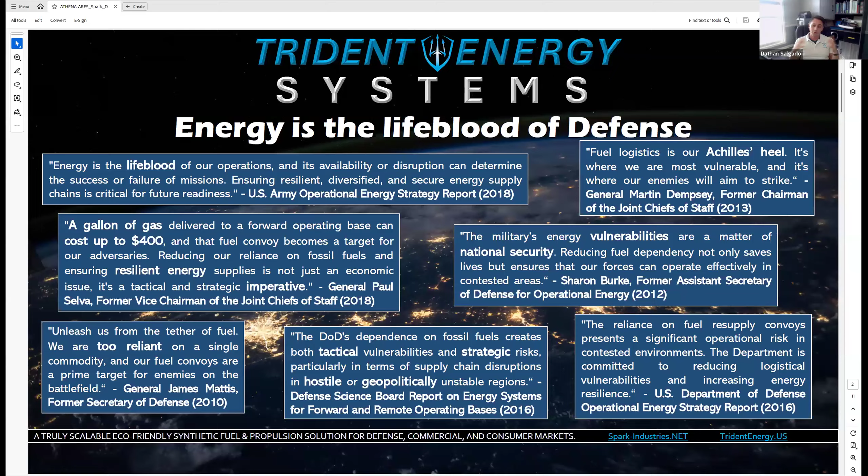So Trident Energy Systems, with our fuel, we can produce it from air and water, operate for between 2 and 10 years unsupported, with a modular palletized fuel production system. And with that fuel, we can do some pretty amazing things.

So the Athena jet engine is the all-altitude tri-mode hybrid electric non-turbine aviation engine, and its derivative, the all-altitude reusable rocket engine, single-stage to orbit. The main difference is that one has a fuel mix that includes an oxidizer for low oxygen or space environments. The other doesn't. Otherwise, it's fairly similar core technology.

So why is it important? We got asked by the SecDef's office to do some engineering comparisons last year. What we came up with was, it turns out an F-15, if we did a max range mission, can get out to about 2,400 nautical miles with standard fuel and engines. With our engine, we can push that out to 13,900 miles, meaning an F-15 could all of a sudden, with our engines and fuels, nearly circumnavigate the entire globe.

And let me explain why our fuel is so groundbreaking. Traditional jet engine stores energy in just one way, in chemical bonds. The problem with that is, when you increase the amount of energy on your aircraft or vehicle, you have to increase weight. The only way to add more energy is add more weight with your high density bonds. Our fuel doesn't. We store energy in 3 ways: thermal, electrical, and chemical, with a high expansion ratio that allows us to do a lot more things more efficiently when we're talking about propulsion or energy.

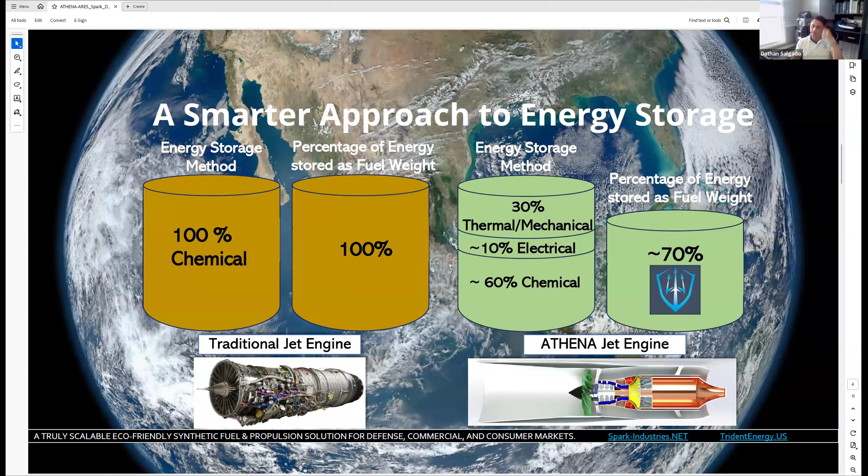So why is it better? A normal jet engine intakes air, compresses it, mixes it with an air fuel mixture, combusts that fuel, and then extracts energy from that burned mixture to run the compressor. Whatever's left over, you get used for thrust or lost as heat. With about 30% of your total starting fuel energy used to run your compressor, about 30% lost as heat, and about 10% lost due to incomplete combustion, there's very little energy left over to become useful thrust.

Since the jet engine was first invented in 1930, the only real advances in jet engine technology have been in material science, allowing us to burn fuel hotter and run better materials in our turbines and nozzles. So as long as you mechanically extract energy from your exhaust the way traditional jet cycles do, the best you can do is about 40% less efficient than the Athena jet engine.

The Athena jet engine cycle is radically different, using fuel to cool the nozzle and run the compressor, similar to how a rocket engine's fuel turbo pumps work. Once the Trident fuel air mixture is detonated, it exits directly as thrust. So you get higher velocities, and you use what would otherwise be lost energy in the heat of your exhaust to run your compressor. That leaves you with about 40% efficiency advantage right off the bat. There's just physics that create a gap there that no other traditional jet cycle will be able to match, even with perfect combustion.

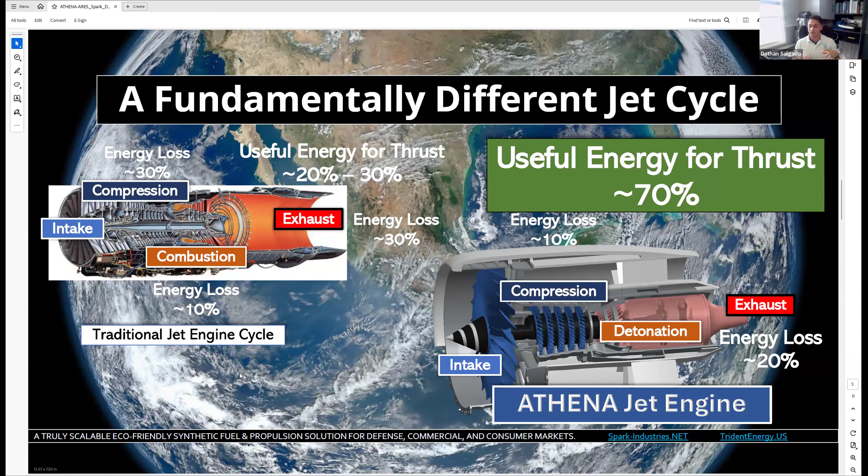Now, when you combine that with nitrous oxide as an oxidizer, which is non-cryogenic, the difference becomes really apparent. Compared to the Falcon 9 Merlin 1D engine, which is a two-stage engine, our single-stage engine would save you over 300,000 pounds in oxidizer and fuel weight to get into space. That means you need less thrust or you carry bigger payloads, and it starts making rocket science a lot easier.

If you look at the fuel efficiency measurement at sea level, 283 seconds versus 4,925 seconds, using the oxygen in the atmosphere as your oxidizer for your fuel — very low at low altitudes when oxygen is abundant — makes the most sense.

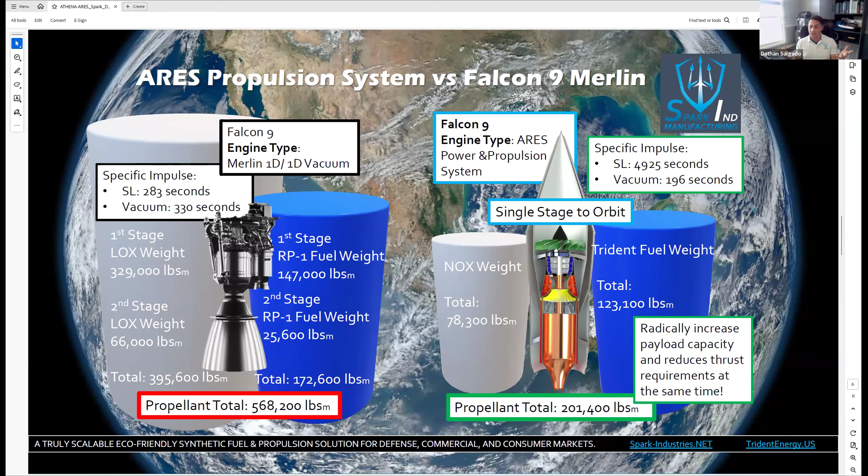So why is our engine better than anything else out there? Well, it operates in 3 modes. We can do a fully electric mode for low thrust operations, taxi, cruise, those type of things.

Or when you want to go stealth, right? Because you're going to have basically no thermal signature, which is huge, especially when you're trying to create the collaborative combat aircraft or NGAD supporting systems, whether that's drones or primary aircraft that want to maintain stealth. There's no other propulsion system that gives you, or that's even envisioned or proposed to our knowledge, the opportunity to actually have stealth in IR, in the thermal range. Everything else is simply in RF, the radio frequency or radar range.

Then we can operate in our RDE fanjet mode, giving you quite a bit of capability and lowering the thrust specific fuel consumption down to 0.33, which is unheard of in jet engines. And then finally, you get ramjet or scramjet mode, which allows us to go at very high velocities. Because we're using rotating detonation and an aerospike nozzle, that gives you a vastly increased altitude and airspeed range where you maintain efficiency. One of the other key things to note is that because we have no high temperature turbine, your maintenance requirements are going to go down drastically.

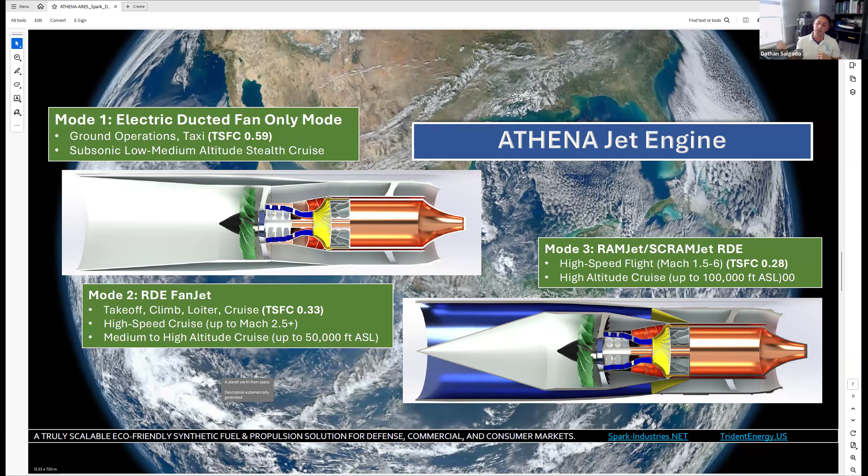One of the things we're looking at for our next steps, we have several phase 2s that we're looking to start work on this year, actually in just a couple months, in conjunction with our FAA Part 33 engine certification program. What we're targeting is TBO or maintenance intervals that vastly put everything else in the market to shame, doubling or potentially even tripling maintenance intervals. And that is the real cost savings that you get over the life of an engine.

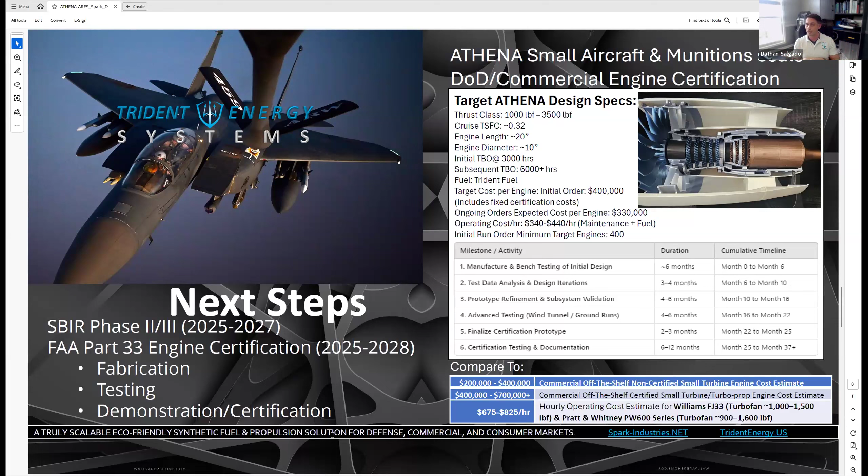You can see what the comparison is. We're projecting an operating cost of $300 to $400 per hour ish versus the $600 to $800 per hour that you get with the same size engine, for this first engine that we're going to do, which is a small scale, small jet or munitions scale jet engine.

30-second warning. Yep. So what are we looking for?

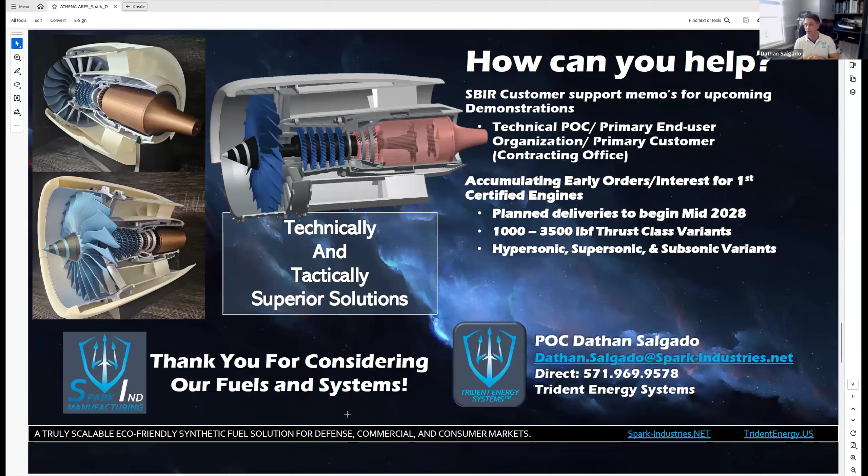Anybody out there in the government that can help us sign our customer support memos for our 2 efforts next month. And then also looking for interest, to accumulate the early orders for our engine certification. We want to drive down that fixed cost, that per engine cost, by getting as many out there. Our target is going to be an initial order of at least 400, but happy to take more and scale our target manufacturing 3 years down the line to deliver on whatever that is.

So that's what we're looking to do. We're working with Air Force, AFWERX, AFRL, Headquarters Air Force. There used to be an A57 Logistics Under Attack Team. They're transitioning to a whole other unit, much more broadly focused on the entire Air Force. And then several partnerships with the Air Force Academy.

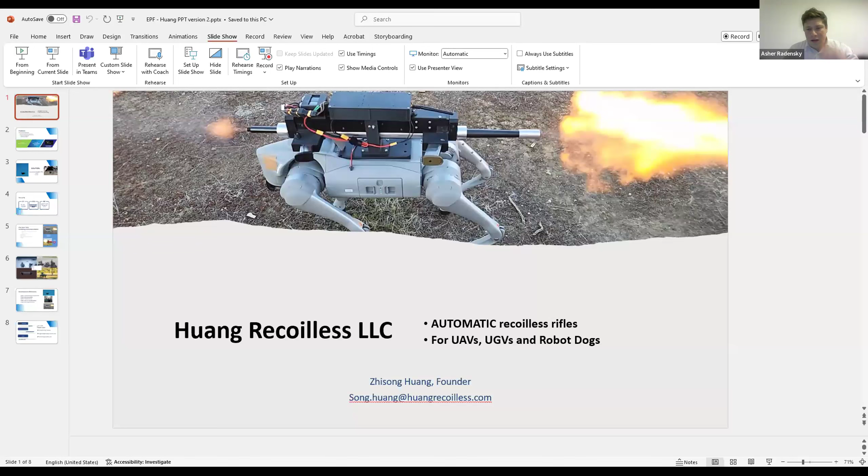Can you guys hear me? Sorry, we can hear you. Yeah, can you switch the displays? Okay, sorry, yeah, maybe, all good. Sorry about that problem, maybe it's because of my display setting. Let me do - yeah, it's just that in the PowerPoint we're seeing presenter view. Is it better now, or do you guys see my screen? I see the whole PowerPoint. If you want to share and then swap the screens, I think that's the easiest way.

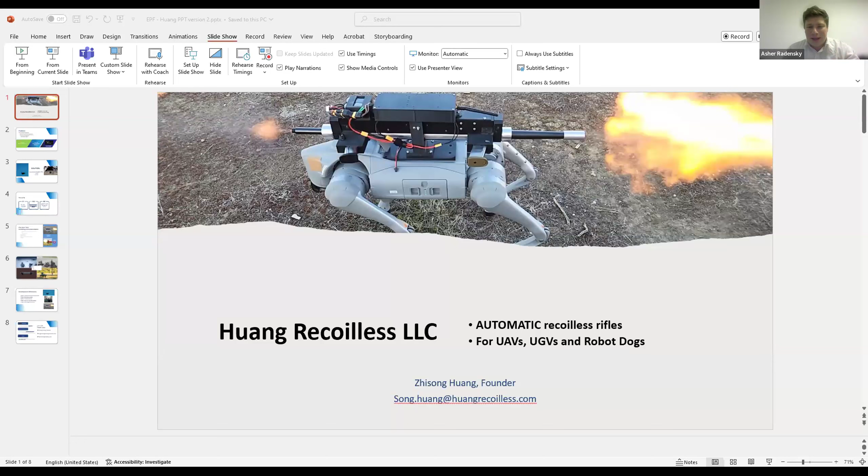Yeah, if you want to do it from the beginning. Here, it's not loaded yet for me. Sorry. No, you're good. I should put it - should I do something here, or do you take care of it? No, if you want, just click play from beginning or present slideshow, and then switch the view. So I can start? Yeah, go for it. Okay, if you want, just switch the view here - if you go to display settings, you can switch the view. I don't know if I'm being too pedantic. Should I go on? On the top bar, right next to show taskbar, there's a display settings.

You see what I'm talking about? Next to end slideshow. That could also work probably. On the top bar on this page. Whatever, yeah, we could go ahead. It's up to you.

Okay, let me quickly try again. Approve, you have control now? Yeah. It should work. Sorry. No, it's not letting me do it. That's fine, but just go ahead.

Okay, my name is Song. I was not a firearm expert, so I think the only reason I got into it is because I can bring some outsider's perspective into a quite long-standing firearm industry. Some of the ideas that are out of the box for them are in the box for me. So it just happens that I think there is an idea the firearm industry should look into, and that's why I got into it. I cannot convince people from my track record, but I just want people to judge the merit by looking at the things that we make.

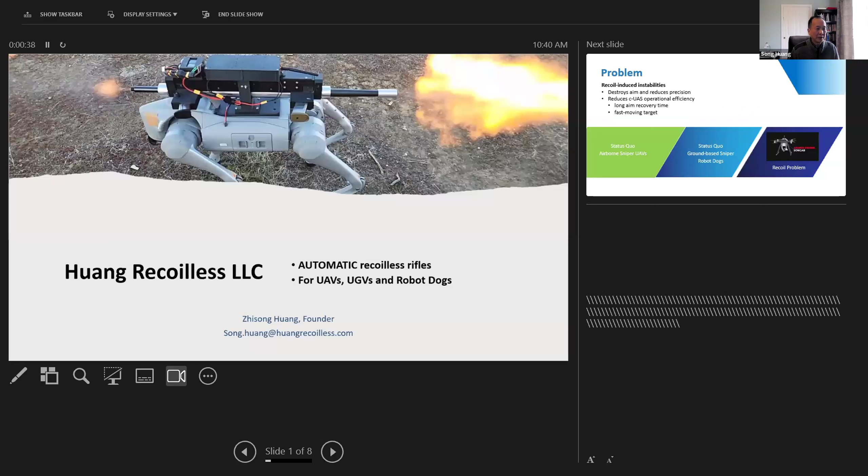Song, I think you need to, here, I'm going to share the slideshow from my side, if it's okay with you, because I think it's not moving forward. I shouldn't have done this extended screen thing. Yeah, I think that's the downfall. Did I? That's okay.

Give me one second, just need to open it. Bear with me, everyone, sorry about that. Brian, unless you want to share it on your end, because it's taking me a second to pull up. Or should I kill my extended screen and restart? Yeah, I could do it on my end. It's fine, it's opening now. Okay, perfect, I have it. Sorry about that, everyone. And I could share sound. So that's good. All right, we were on slide 2, right? Yeah, perfect.

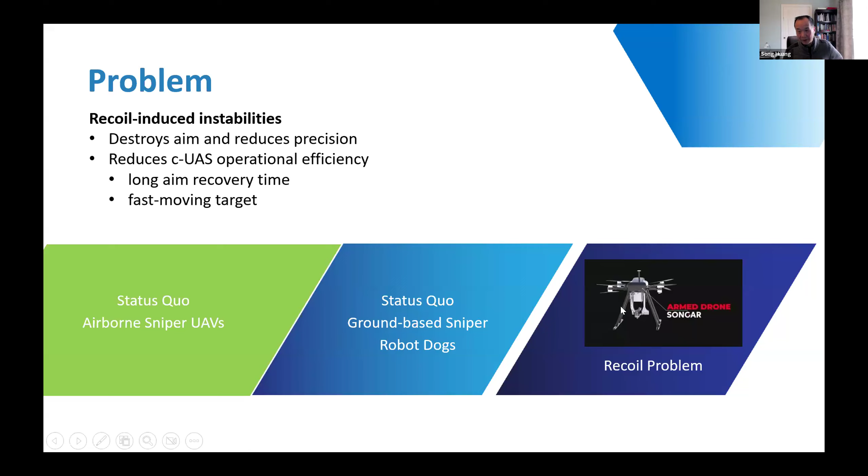Okay, I think I got this. So basically, let me just quickly go through. So the problem we are solving is recoil-induced instabilities, and let's see if I can move on. Can you move to the next slide? Yep.

Okay, so the benefit of a recoilless unmanned system is obviously stability, as you just saw, and increased precision firepower. It will also increase combat efficiencies in multiple combat scenarios, such as counter-UAS, swarms, and other cases. Next slide.

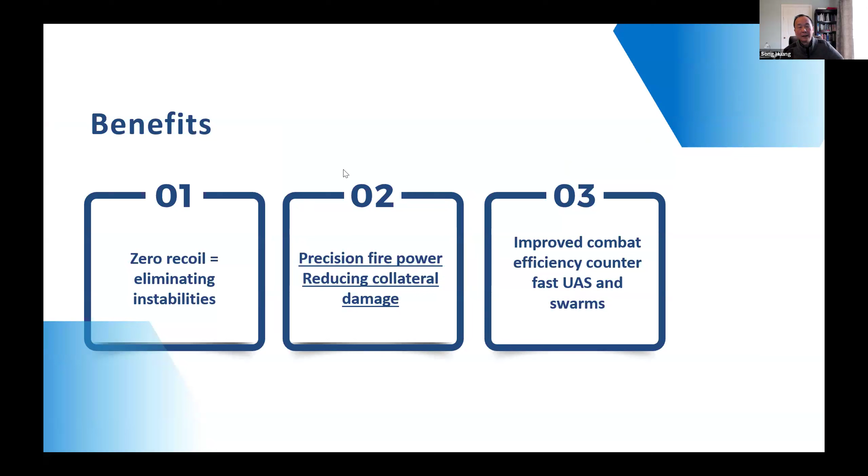For example, if you put it on a drone, you can only get one shot per mission, because the drone has to come back to be reloaded. Ours is fully automatic, so you can basically empty the ammo in the magazine during your mission. In essence, what we achieve is a way to integrate Maxim's idea into a Davis gun design, such that the recoilless rifle has all the operating characteristics of a machine gun, and it's also very fieldable. Next slide.

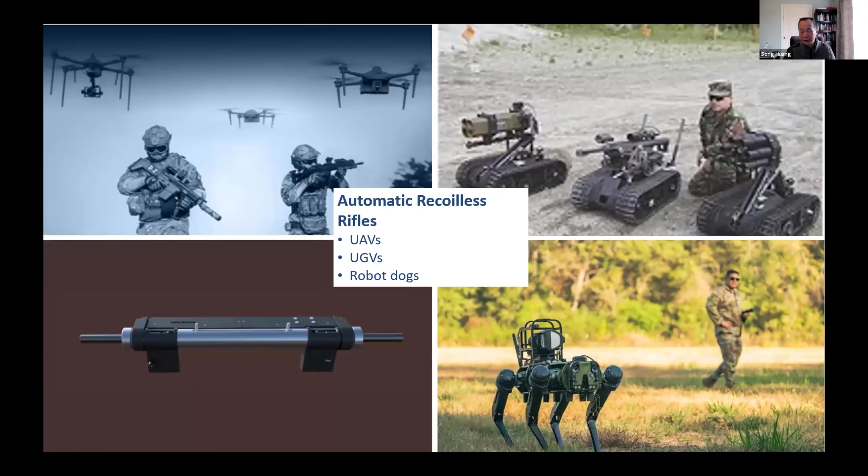Can you get to the slide where it shows the traditional one? No, the other one, the one that shows how you... yeah, this one, okay, I'm sorry. The next one? Yeah, this one, okay. No, okay, go back to the one that shows the compare, yeah, this one. Okay, no, yeah, okay that's fine. Actually, okay, so yeah, I'm sorry about that.

What happened is that the conventional recoilless rifle ammunition is very special. It's designed to use ammunition where the propellant goes in one direction and the projectile goes in another direction. It's a single piece ammunition. Our innovation is that instead of doing that, we divide that tube into two. So you use regular ammo to launch the projectile—in this case, a regular machine gun ammunition—and then you use a second ammunition to launch the compensating mass, in this case a blank ammunition. So the ammunition we use is composed of first a regular machine gun ammunition for launching the projectile, and then a custom-made blank ammunition to launch the compensating mass. And those can be very cheaply made.

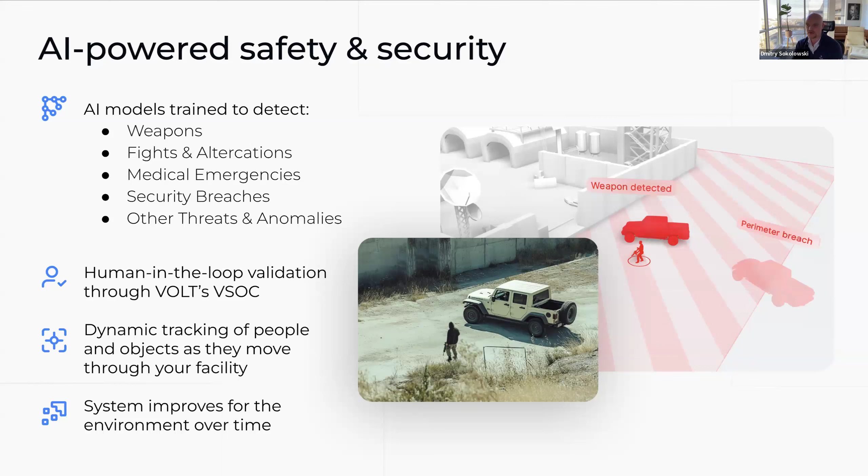We've built a proprietary algorithm to actually do the tracking, so we don't rely on facial recognition. We take into account a lot of visual features of an individual, as well as temporal features of how people are walking, the gait analysis.

We create a fingerprint for individuals across the cameras, and no matter what cameras you have, that individual can be tracked across many of these cameras, all in real time. We don't actually identify that person to a given identity — we fingerprint them, so to speak, and track them without the need to invade privacy or run into other regulatory restrictions.

Lastly, we enable security practitioners to do historical investigations of what happened much faster. Utilizing Gen AI capabilities, you can interact with your security infrastructure now with normal natural language. You can say, hey, show me where the white cars are.

Now narrow it down by only parking garages. Now narrow it down to where people interact with these cars. That really quickly pinpoints exact locations, cameras, and the time you need to investigate. And from that point on, you can say, create an incident, add these frames to the incident, and so on, without spending hours and hours to find where the incident occurred.

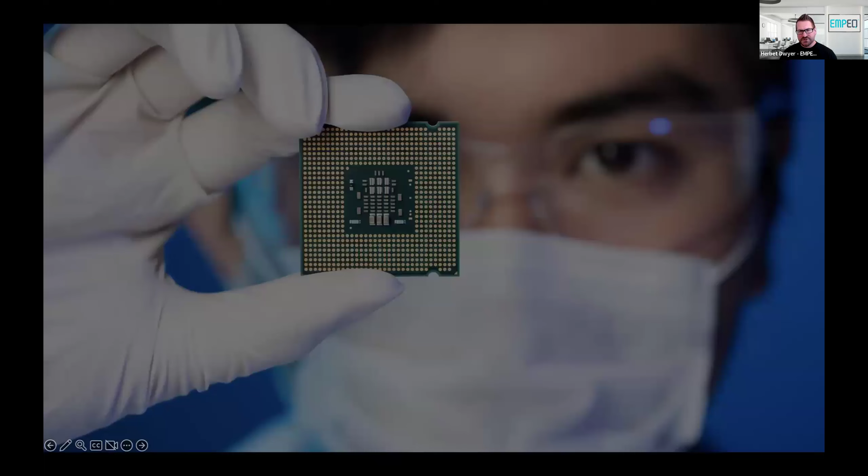Teams of people tediously inspect parts and equipment and do everything they can to ensure there's not a single counterfeit part amongst them. The work they do is critical for our personal safety, national security, and our way of life.

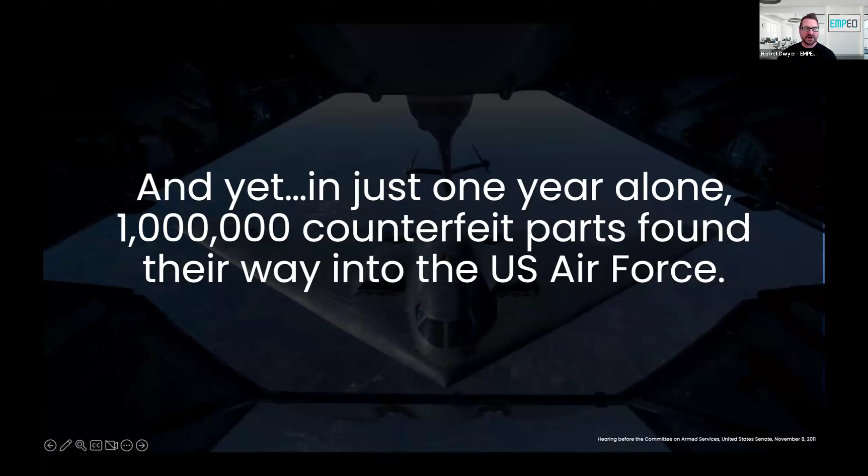Yet in one year alone, over 1 million counterfeit parts found their way into our nation's defense systems. And this is only one year in one division of the federal government. The issue is even more rampant in the commercial sector, with over 25 million parts annually.

United States Air Force pilot First Lieutenant Schmitz was an unfortunate victim to this massive problem when his F-16 crashed and killed him, 100% due to counterfeit parts.

But why do counterfeits pass through? Because inspecting and analyzing equipment and parts takes expertise, a distributed workforce, and many times expensive laboratory facilities and research. None of these are scalable solutions.

Hi, my name is Herbert Dwyer. I'm a Marine veteran and former NSA task operator and critical infrastructure auditor. I co-founded EMPEQ, a company purpose-built to fix this problem and others like it. Our mission is to connect the equipment you see with the information you need for faster, more effective decision-making.

I've assembled the best team I could find. Here's some of my key people, including our CTO, James Crouch, who was handpicked by Steve Jobs in 2008 to stand up Apple's App Store. He's an expert in cloud, mobile, AI, blockchain, and many other deep technologies. The rest of my team, including myself, are experts in various necessary disciplines to create a rounded minimum team.

So why do we call it data enrichment for critical infrastructure? Imagine being able to take a picture from your smartphone and get insights on accurate data on complex equipment and parts in a fraction of the time it takes using traditional methods. That's exactly what EMPEQ does.

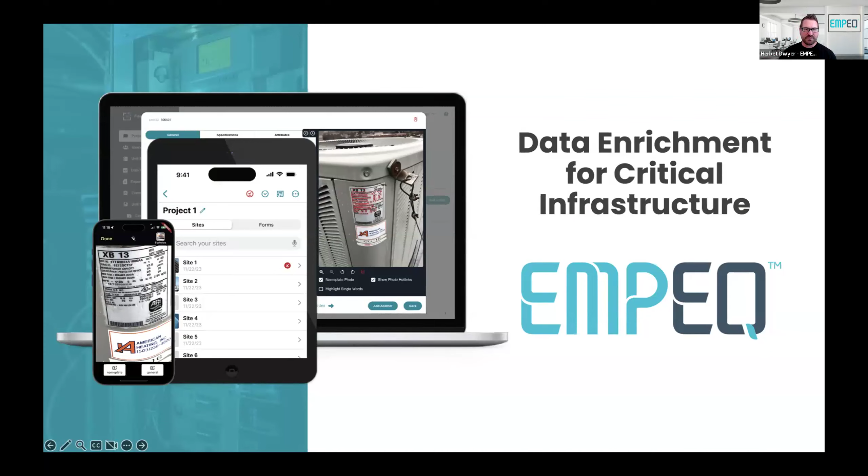Our solution combines cutting-edge computer vision, applied intelligence, small vision models, and extensive data sets to transform the way we capture and analyze data of the many types of critical hardware that power our globe. Plus, we're building the world's largest equipment and part repository. We've also generated unique IP and are seeking 4 patents.

It's not just the lurking counterfeit parts in our critical infrastructure we should be concerned about. It's also the faulty logistics systems, antiquated and inefficient equipment and parts that are hidden threats. We experience these hidden threats in our drive home, flight to a conference, in our office buildings, the cars we drive, the boats we sail, and many other things that contain hardware.

This is why it's a quite large market, standing at almost $30 billion across the globe with a SOM of $2.2 billion, again, annually. The core of our platform has the ability to connect images of real-world objects with the information professionals need to make critical decisions about parts and equipment.

But it can also be used for logistics. For example, the Department of Air Force plans to use our technology to replace old 1950s processes like simply identifying parts for replacement or repair.

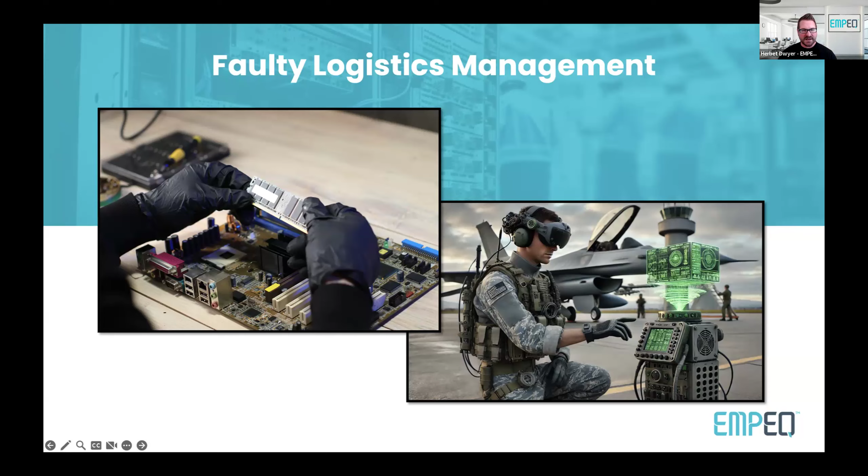Plus, in the future, those great technologies like augmented reality will need a back end to really identify what the warfighter is looking at and seeing and providing instant insights. Let's also not forget about some of the less sexy uses of our technology, including building energy audits and helping the DoD pass its first audit in many, many years.

Our competition typically includes individual substitutes being stacked that lack the specialization and cohesiveness to equal the power of EMPEQ. Because EMPEQ's solution combines cutting-edge computer vision, applied intelligence, and extensive data sets to transform the way our customers capture and analyze data.

EMPEQ's go-to-market plan is working. We've already closed paying customers and partnerships with some of the largest industrial leaders worldwide, including the US DOE, Canada, Johnson Controls, Siemens, and others. Plus, we also have a closed contract with the Pentagon.

The Department of Air Force at the Pentagon contacted us to solve the counterfeit part conundrum and awarded us a direct phase 2 contract. We're just wrapping that up actually next week.

And given our D2P2 success, the DAF has expanded our contract to include a $2 million TACFI with the head of supply chain to tackle many of the integrated weapons platforms like the B-1, Minuteman III, B-52, and F-16. Finally, the warfighter can get these critical platforms back in service much faster by dumping old processes and replacing them with EMPEQ.

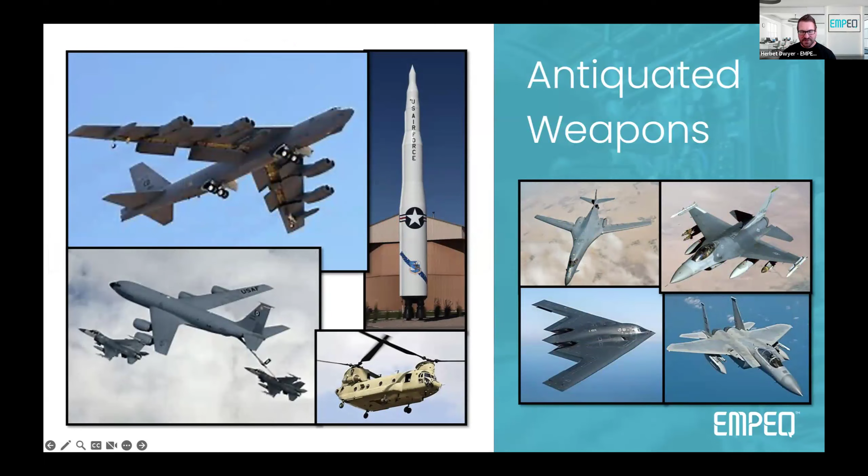Today, we're here looking for program offices that are interested in partnering, investors for EMPEQ's current financing round, partners for future SBIRs and STTRs, someone or maybe multiple someones for the Mentor Protege Partnership Program, and of course, commercial and government customers. Thank you very much.

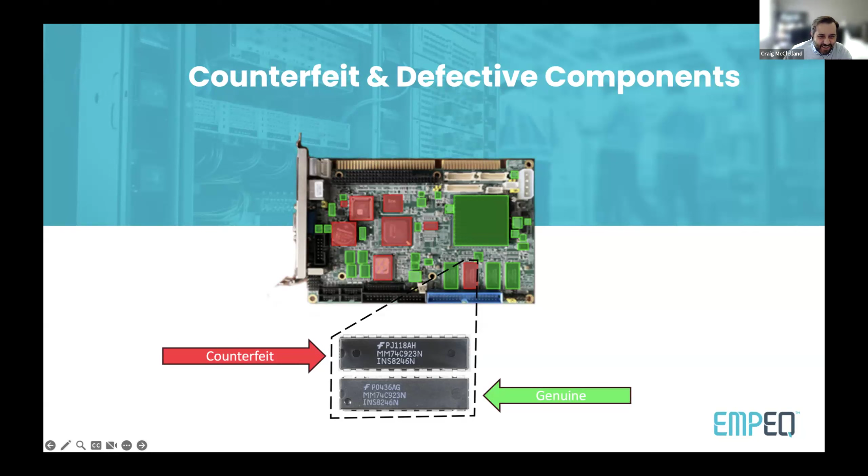Many, actually—Canada is a great partner of ours. We are partnered with Natural Resources Canada. We are the front end for RETScreen, which has about 800,000 users worldwide. It's an incredible energy modeling platform, the biggest in the world, actually. So we finished phase one, we're moving to phase two.

But yeah, as you mentioned, Carleton and many other universities and campuses across Canada. I won't mention specific customers and sites without permission from our customers who did those audits, but yeah, we are very active in Canada.

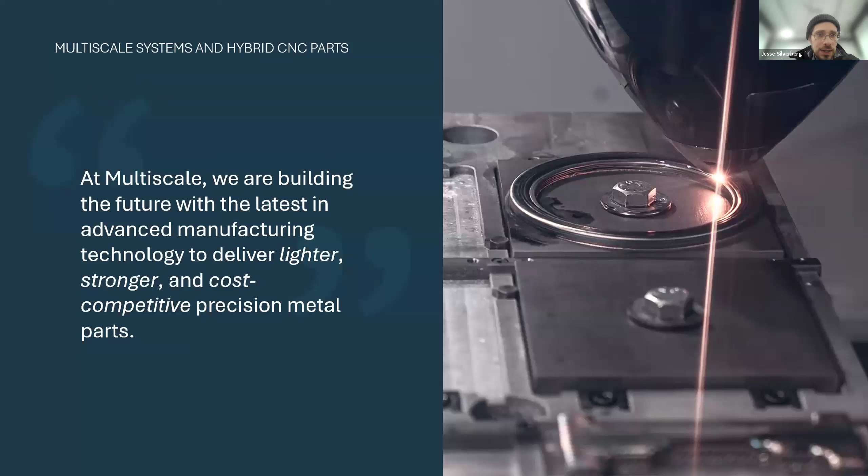Multiscale Systems is really focused on engineering and design, whereas Hybrid CNC is all about precision manufacturing with some advanced manufacturing techniques. At Multiscale, we are building the future with the latest in advanced manufacturing technology to deliver lighter, stronger, and cost-competitive precision metal parts. On the right-hand side, you can see a photo of an example where we have a part being built with a hybrid process, which combines both additive and subtractive manufacturing.

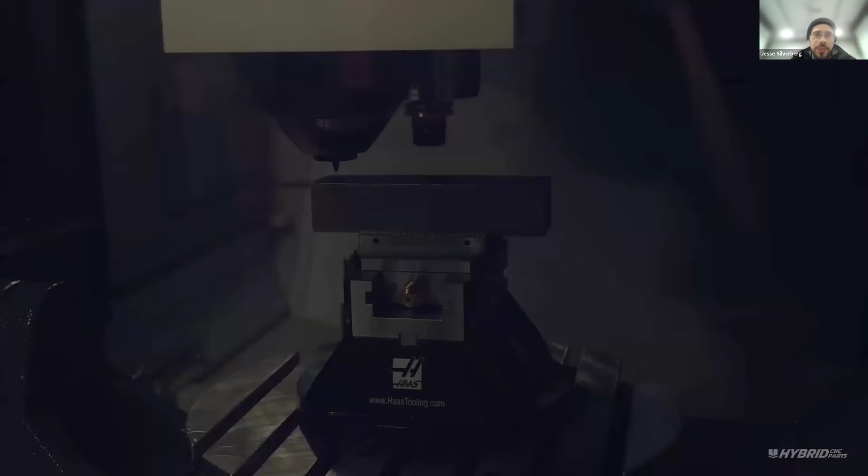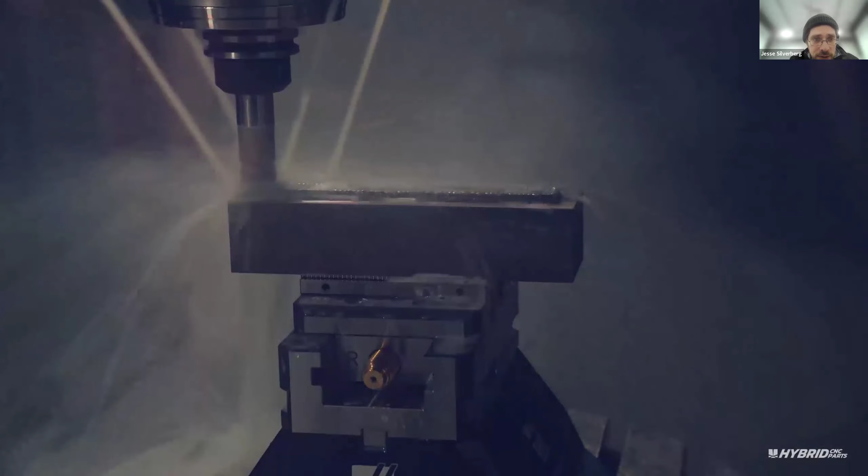This is some promotional video from our CNC manufacturing group, showing what the hybrid process looks like. Essentially, what we're doing is fixturing up materials, and we are laser welding from wire to create stock material that we then precision machine. In the background you can see the spindle, and now it's moved to the foreground where it's using the cutting operations to bring that part into shape.

We are comfortable not just with additive and subtractive techniques in a single fixture, but we can feed in multiple different wire feedstocks to allow us to weave together different types of alloys. In addition, all this happens inside a 5-axis CNC, which allows us to get a very high degree of complexity. All that information is available on our CNC shop's website if you want to see more about what they do, essentially a job shop.

From the perspective of this audience, what's important to highlight are a couple of the differentiators and competitive advantages for our technologies and process. On the additive front, there is a lot of scar tissue in the industry built up from powder metal additive manufacturing, and I want to distance ourselves from that and say we are working with wire, not powder. We are producing fully dense components in a finished state with this combined additive and subtractive technique, which allows us to offer low volume production that's flexible with no minimum quantities.

Because we are vertically integrated with engineering design, we have a team of people trained to think about what hybrid manufacturing processes can achieve, whereas people who have come up a more traditional manufacturing route tend to think in purely subtractive, purely additive, purely injection molded, or purely thermoform processes. We really have the ability to create tailored components for unique requirements, even down to reverse engineering legacy parts and replacing them with our techniques.

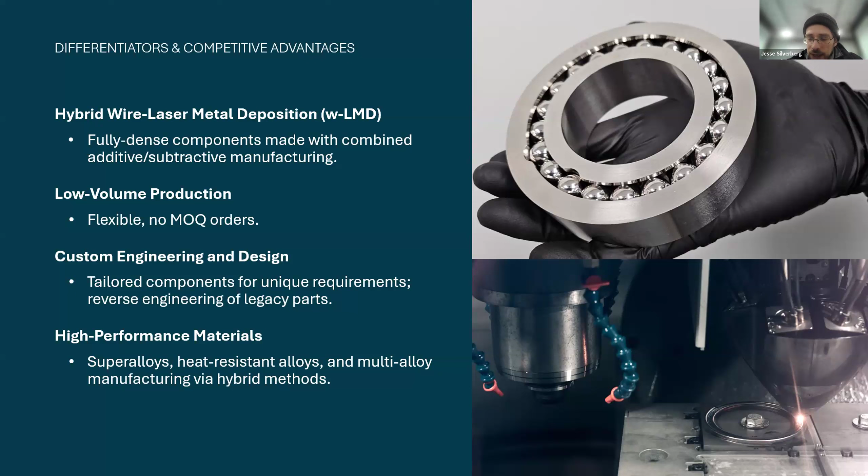The other important point is that we've found a niche for ourselves in high performance materials, things like nickel super alloys, cobalt chromium alloys, high molybdenum or high chromium content alloys. Being able to combine multiple materials into a single structure is another unique thing our technology lets us accomplish. As far as applications go, we got started with all of this on SBIR funding, starting with Department of Energy, but it has expanded into NASA SBIR funding as well.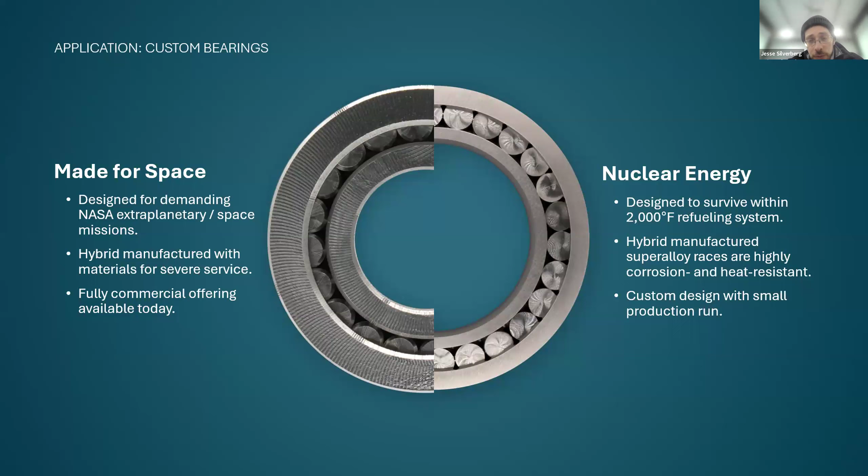In both cases, we do the design work, we do the first articles, we do production, and we do inspection as well. So again, vertically integrated.

Oh, hey, look at that. I got a bullet point on this. Vertical integration.

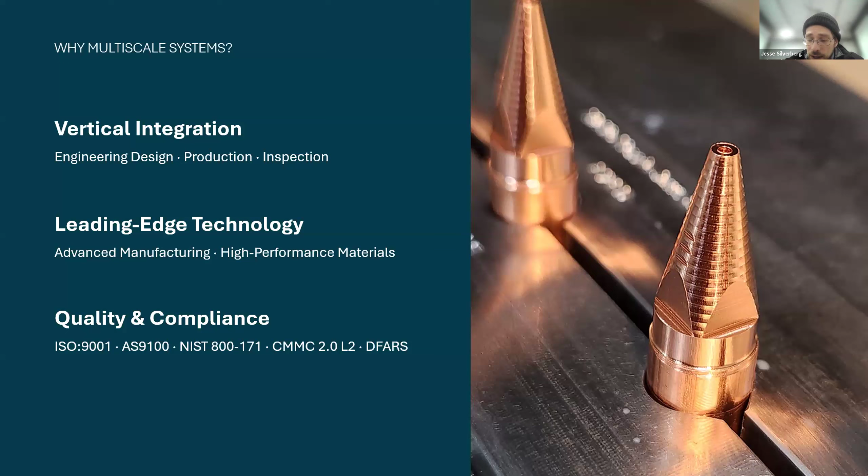Beyond that, leading edge technology - I hope I've really highlighted what the manufacturing technology can do. It's also worth stating for this audience that we have several important certifications: ISO 9001, AS9100, important on the manufacturing and quality side. And then these last three, NIST 800-171, CMMC Level 2, and DFARS - depending on how you come into cybersecurity, you'll learn one if not all three of those acronyms. We are compliant with the necessary cybersecurity requirements to be operating in the spaces we operate.

So, ultimately, we are a group of nerds. We like to solve problems, and we don't like solving problems that no one actually has. We like solving real world problems. So for the folks here who are end users of the parts that we make, we really want to know about your toughest problems. We want to know about the challenges you're having, and we want to propose solutions. We want to create those solutions.

And for the folks here that are more financially oriented, on one hand it would be great to be introduced to your portfolio companies to see if we can help them be successful. But I'll also add that as an organization, we bootstrapped up over the last 6-7 years, thereabouts, with SBIR funding and more conventional lending, and we're really in a really exciting position right now. We've tripled our production capacity. We're in the process of breaking ground to build a new manufacturing facility that'll be open in about 24 months. And we're really looking to try and hit our growth curves.

So I'm happy to talk with anyone and everyone who has any question, unless it's about the meaning of life, because I can't answer that. So I'll say thank you. I'll turn off the screen share so I can see people and take any questions you have. Thank you.

I was planning about asking you about the meaning of life, but I'll let other people go first. Perfect.

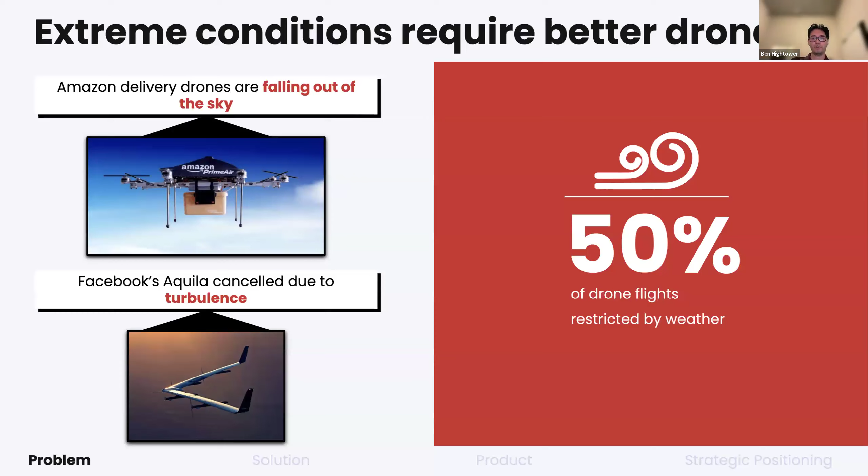10 years ago, we were promised a future with flying delivery, flying internet, flying cars, but it's 2025, and a lot of companies have scaled back their drone divisions. There's been huge leaps and bounds when it comes to miniaturizing electronics and battery tech, but stabilization methods to fly in bad weather have remained stagnant. So currently 50% of drone flights are restricted by bad weather, and that number is only going to go up with climate change. So we can't control the weather, but we can control how our drones handle bad weather.

Current AI struggles because it tackles this problem at a high level. It does things like path planning and obstacle avoidance. It's abstracted away from the low-level, low-latency controller that directly interfaces with the motors. At AI Fly, we uniquely engage turbulence at this fundamental control surface. We do this in a software flash that is plug and play with existing flight systems.

Increasingly cheap compute has enabled reinforcement learning-based AI like us in a variety of fields, one recent example being DeepSeek R1. Through funding from the NSF, we've developed a proof of concept technology that can achieve a 100% increase in the performance envelope, enabling 4 times more flights than current protocols.

As an aside, as part of the NSF program, we conducted hundreds of interviews with drone operators in the US military and private industry. Typical protocols say that you can't fly in winds exceeding 8 meters per second. We can extend that flight envelope up to 16 meters per second. That distribution isn't uniform, it's not 16 meters per second wind as much as 8 meters per second wind. So even though we double the envelope, we enable far more flights near that 8 meters per second threshold.

Equally important as enabling flight in these adverse conditions, our tech also allows us to collect brand new weather data. This is important because to mitigate climate change, we need to predict it, and to predict it, we need data. Current weather models rely on data from weather stations, radar, or balloons, but storms are too difficult to peer into to resolve the winds aloft with our satellites. So we get these spaghetti plots of trajectories.

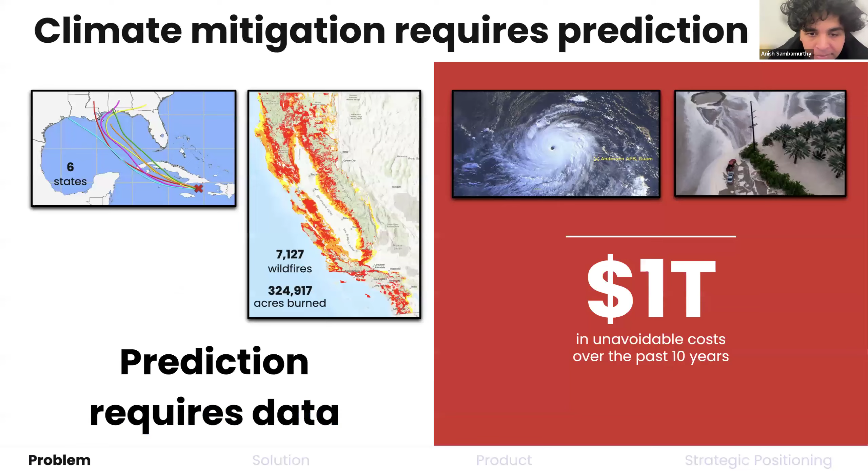And kind of fundamentally, you can think of this as control and uncertainty. So I think the biggest application that isn't airborne is actually naval. There's a group with NASA that we are talking to, and it's basically tracking buoys, which is a similar type of problem. But usually, if you have any sort of system where you can't write the physics down super well, and simulating it is very expensive, and you want some type of control mechanism in those environments, this technology has some kind of traction in that space.

Sure, that makes a lot of sense. That makes a lot of sense.

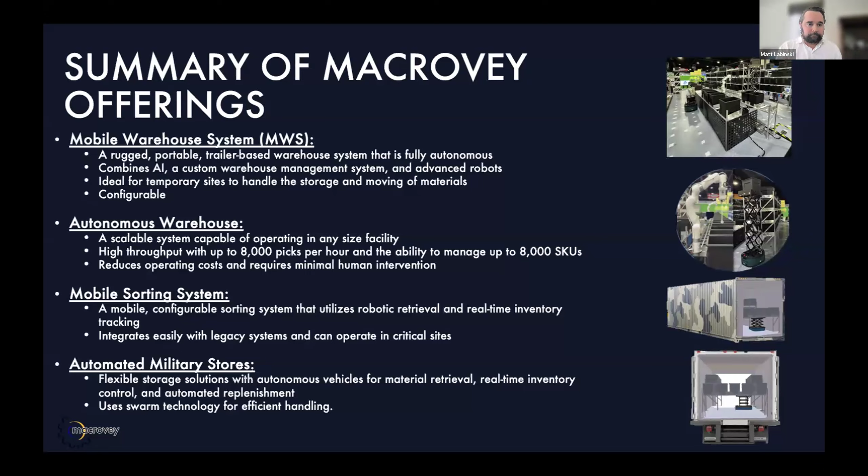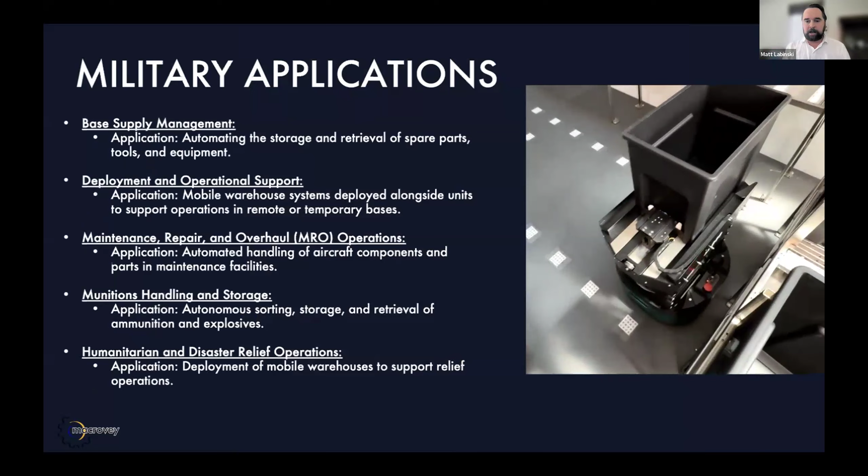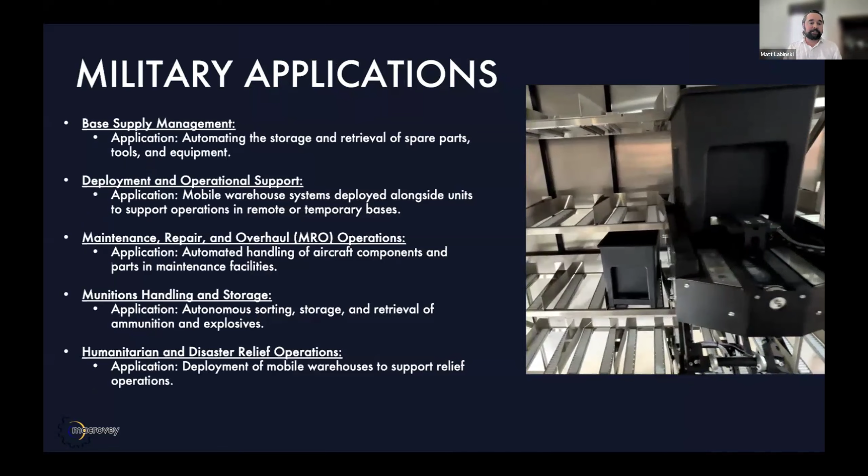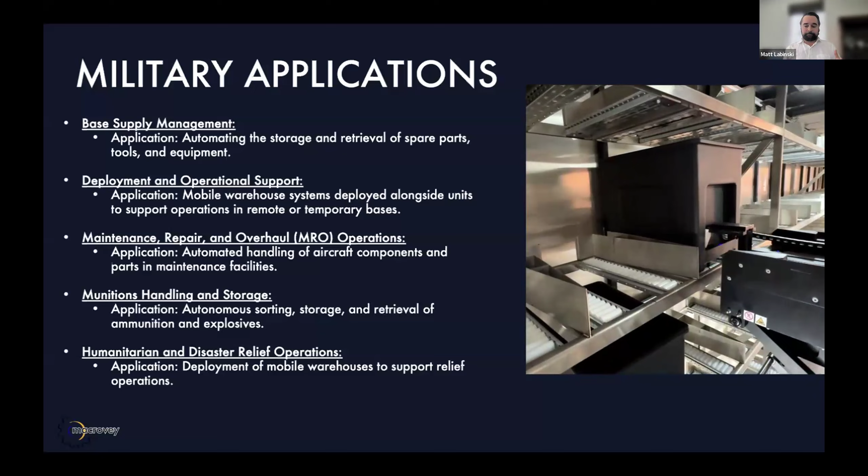As far as military applications, you can look over all of these, but I'll go over one that we're currently working on. A major defense company asked us to look into fully autonomizing the drone assembly process. So they build these drones, and right now it's a lot of manual labor as far as putting the pieces together. With our system, we're able to move that drone through an assembly line using 6-axis robot arms with tools, and then robots to move it down an assembly line process, fully automating it up to 99%.

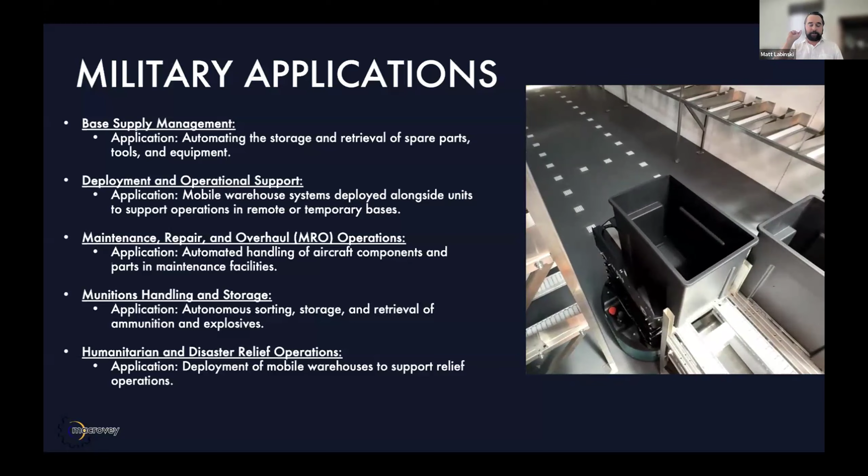In addition to that, we're also helping them with automating the repair portion of it. Right now, when a drone is coming back from its mission, it can ping our system what parts it needs replaced. The system will then say those parts are in these bins. The robots will take those bins, the 6-axis arms will pick those items out, place them into a final bin, and then the robot will take that to the landing strip where it would meet a tech to do all of the replacement parts. So again, just fully autonomizing this process to have less human intervention.

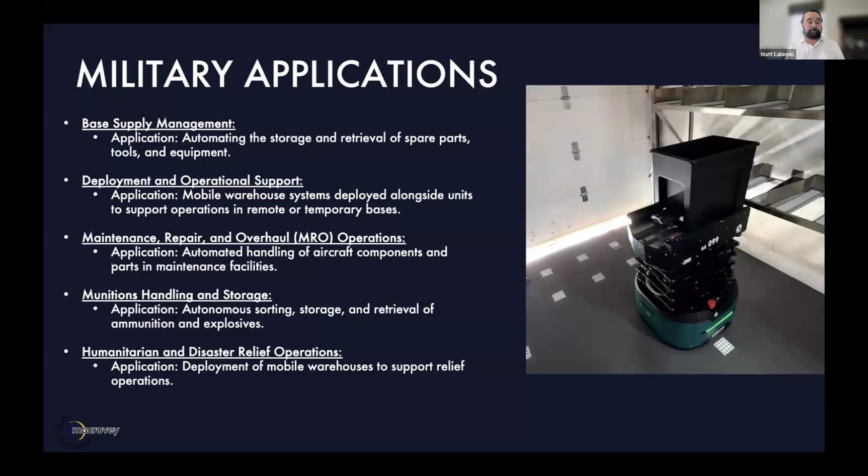The idea also with all of this is that we can place all of these together to have a fully autonomous system in a remote airfield, using that autonomous warehouse and those sorting trailers to basically autonomize all the processes needed.

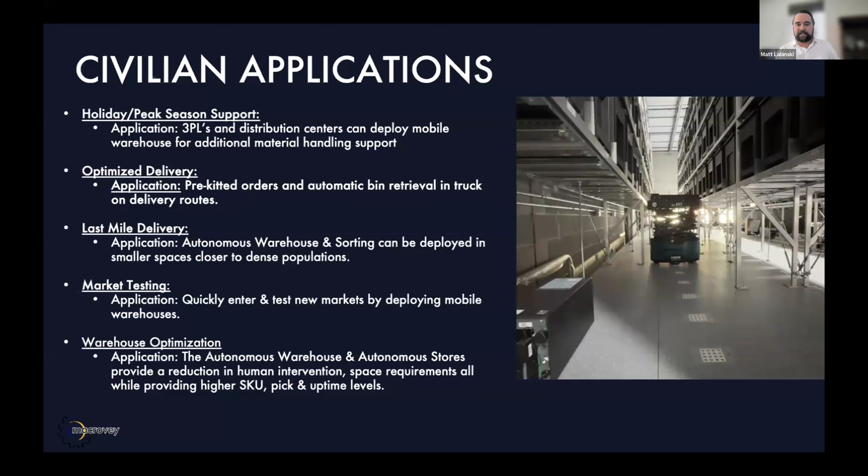As far as civilian applications, we have some listed here, but I'll tell you another one we're currently working on. A global snack company was looking to automate the process of creating their variety chip boxes, the ones you find in the grocery store with a bunch of different flavors. Right now it's a very manual process of people taking chips and placing them into boxes. With our mobile warehouse and mobile sorting, we're able to have robots pick and choose which chips need to go into each box instead of doing it all manually, removing any need for human intervention.

Just to go over some of the benefits - this does have enhanced flexibility and scalability. These are not out-of-the-box systems; we work with customers to design it based on their needs, whether that's how big the parts are, space requirements, or if it's mobile or fixed. These are designed specifically for customer needs.

We also found that it reduces capital investment, especially with those mobile applications. You don't need to buy large warehouse spaces, especially if it's a temporary job. It also lowers operational costs long-term - these robots have a lot longer shifts than humans would, and the system uptime runs quicker. The scalability of it, everything's more optimized with these systems, and that's something we really try to do for our customers: find ways to optimize their facilities and make them fully autonomous.

Thank you very much. Right now with AFWERX, we're looking for some stakeholder feedback on industry issues, and any direct to phase 2 sponsorships. On the civilian side of things, we're also talking with some VC companies right now, pushing in a little bit more capital to grow this business. So thank you, any questions?

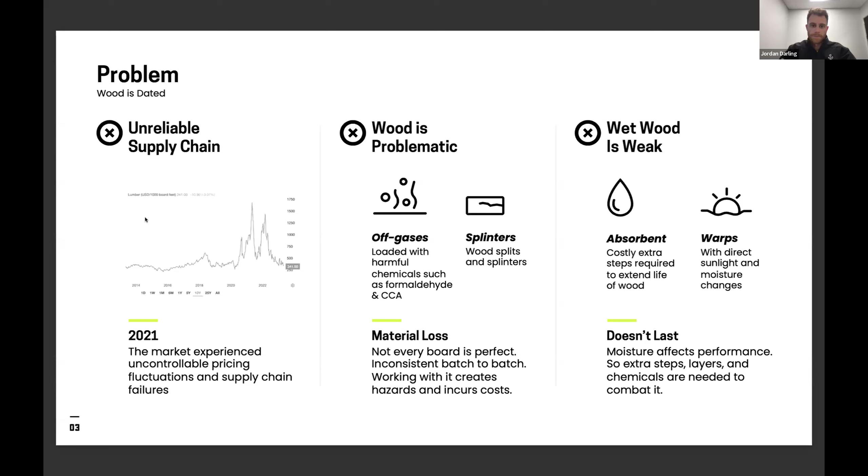The other big problems are associated with plastic waste. By 2040, one key metric is there'll be over 700 million tons of plastic in the ocean, which will surpass fish, more plastic than fish. Also, every year around 5 million acres of trees are cut down in the US alone. And as I mentioned, wood, whether it's OSB or plywood, has detrimental effects from the environment with warping, rotting, and splintering.

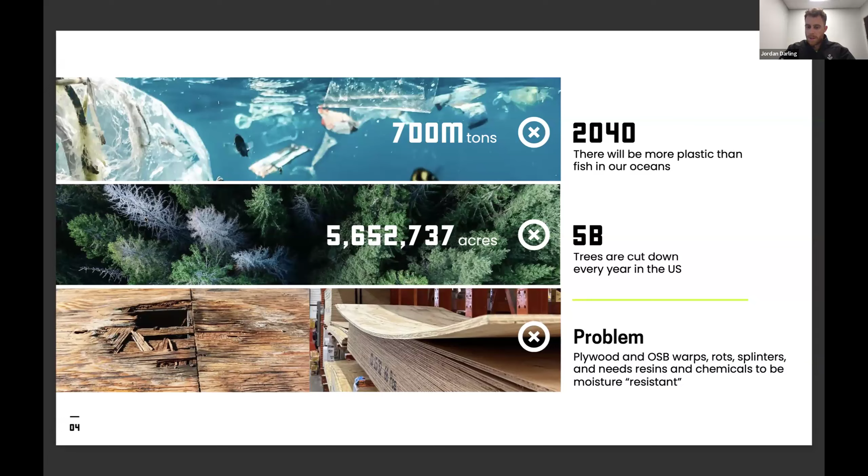How Supersede solves it: we're a material science company, and we've spent about 2 years developing a formulation that allows us to have the same weight as a wood-based product while having twice the density. That's a combination of specific formulations and additives, leveraging recycled feedstock, a systems engineering approach, developing a product that has multiple use cases and applications all within the same form factor, and leveraging proven manufacturing processes that allow us to easily scale this business.

As you can see in this picture, our product is a hollow profile design. We developed a proprietary shape that allows us to remove half the amount of material because we're twice the density, while maintaining the same mechanical properties or better than a wood-based product.

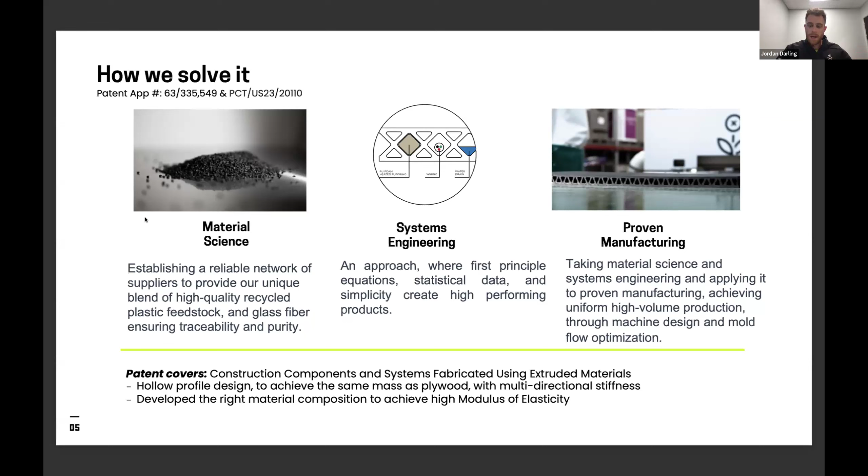The product that we launched in October of last year is called the Supersede board. The product you see here today is a marine grade lumber replacement that is 100% waterproof while being made out of 100% recycled plastic. This product is waterproof, always square, has consistent performance, is made with non-toxic materials. Our material is recyclable, but also our product is 100% recyclable. We offer a buyback program to our customers, and we have supply chain consistency.

We've drastically reduced the complexities of the supply chain seen in the lumber industry and have made it soon to be all under one roof. This is good for manufacturers, for modular homes, boats, RVs, and trailers, called specialty vehicles. And then also our North Star is getting into the construction industry, where we have structural subfloors, roof sheathing, and exterior wall sheathing.

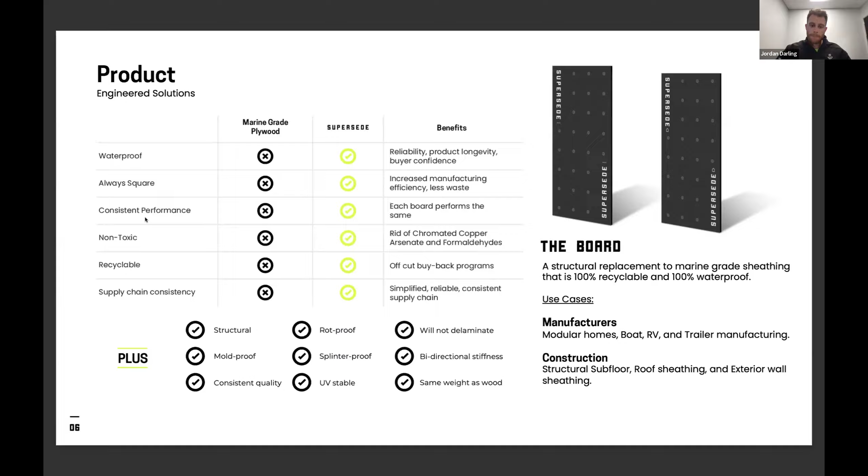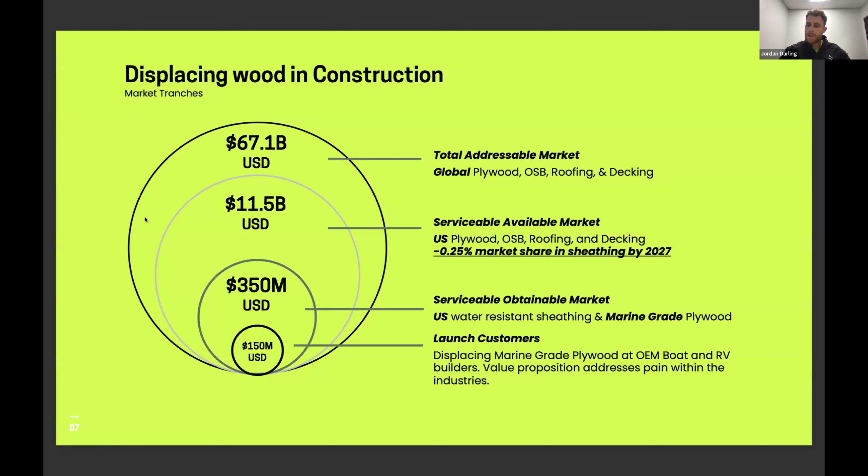As I mentioned, our launch market is tackling marine grade lumber. We are the only waterproof, non-wood structural replacement to marine grade lumber today. Our secondary market is expanding that into construction, which we'll talk about.

We have an ICC accreditation, which is the International Code Council, the governing body that governs building materials and construction. We've already passed that hearing and we have that accreditation. We just have some additional testing we have to do, and then we complete that and jump into construction.

Outside of that, our processes, our materials, and our IP expand outside of sheathing, allowing us to get into the decking market, other non-structural things like architectural lumber for interior and exterior, concrete form boards, and other different form factors with our manufacturing process.

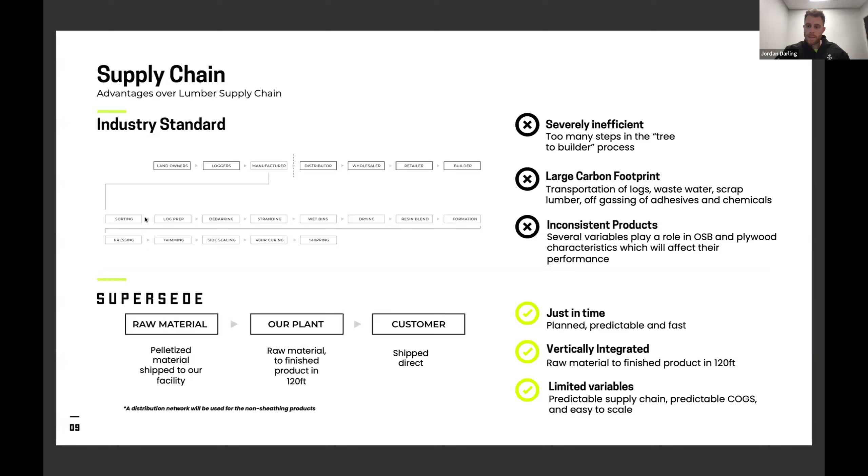Today, we have raw material come into our facility, our manufacturing processes that material. We go from raw material to a product in 120 feet, and then we ship direct to our customer. As we expand this business and go into other verticals, we will leverage distribution to be able to tackle other markets.

This outlines our plans for this year and beyond. Today, we have a factory that can produce around 80,000 sheets per year. Later this year, around Q2, Q3, we'll be doubling that capacity in-house to around 160,000 sheets. And then towards the end of this year, we'll be opening our second manufacturing facility in the Midwest, which will quadruple our manufacturing capability.

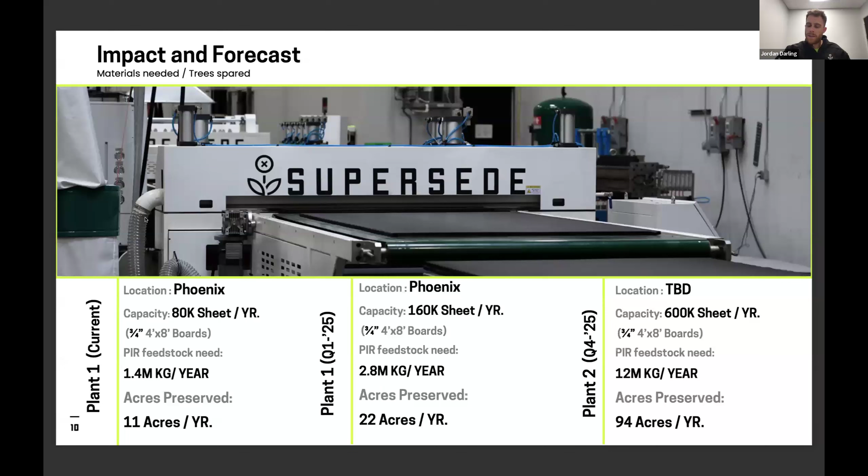The big thing with our plants is we are extremely square-foot conscious. We can produce the same capacity in about 1/100th of the size of a lumber facility today.

This is our senior leadership team. As I mentioned, I am the COO, Jordan Darling. This is the CEO and co-founder, Sean Peterson, and our other co-founder and head of engineering, Shane Kenyon.

Our background is in electric vehicle manufacturing and industrial design. We've taken what we've learned for over a decade in manufacturing, innovative and pioneering the electric vehicle space, and are trying to advance and bring technology improvements to the lumber industry.

In summary, our product is good for builders, good for manufacturers, good for the environment, and good for our partners. We provide in-kind engineering services to our partners, whether they're OEMs, government agencies, or builders, leveraging our engineering knowledge and experience to help build better products with our product.

We can support circular economies and zero waste to landfills, which a lot of large companies and OEMs have as initiatives. Those are hard to achieve when using lumber, and we can achieve that with our alternative. Our product is safe for the environment and safe for the manufacturers and employees that use it.

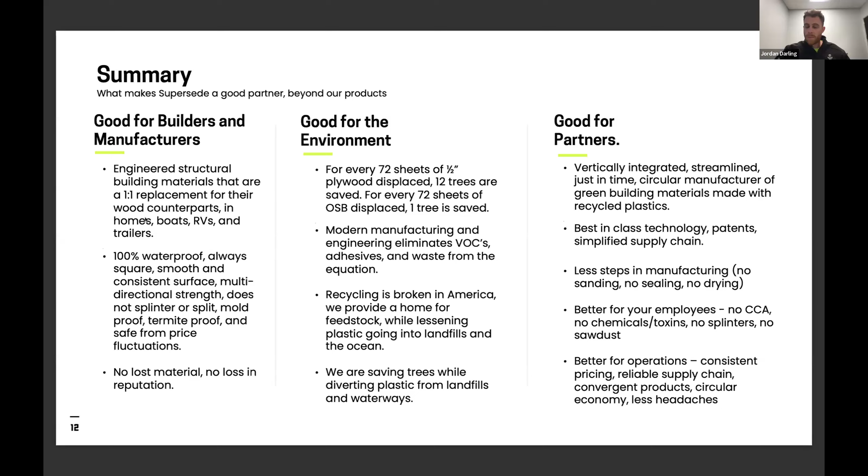Thank you, and any questions?

Awesome. Thank you, Jordan. Yeah, feel free. Lee, go ahead. Great presentation. I don't know the applications in Navy, but boy, I think this is so cool. Question, is there any considerations for unique tooling or storage, and how does it work with coatings, please?

Great question. Yes, our tooling is very unique for the application. We designed the die in the shape of which we extrude today. In our factory, we have around 2 to 3 dies per machine. It takes us about 2 to 3 hours to change dies based on the application. As far as coatings go, our product can be laminated. We actually ordered a lamination line that'll be coming so we can laminate onto the sheet. We also have the ability in our manufacturing process to co-extrude different polymers.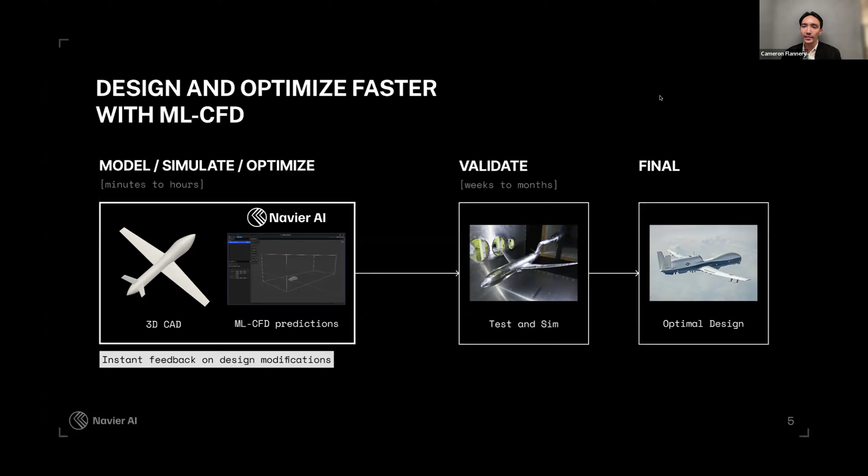And this is replicable across different types of physics. We do this for aerodynamics currently, given that is our background and an area of interest to us. It's also a high value type of simulation that takes a long time, but we can replicate this across different domains. This is an automotive simulation, again ground truth on the left, prediction on the right. We can also extend this to heat exchangers, different types of physics like materials, structural, etc.

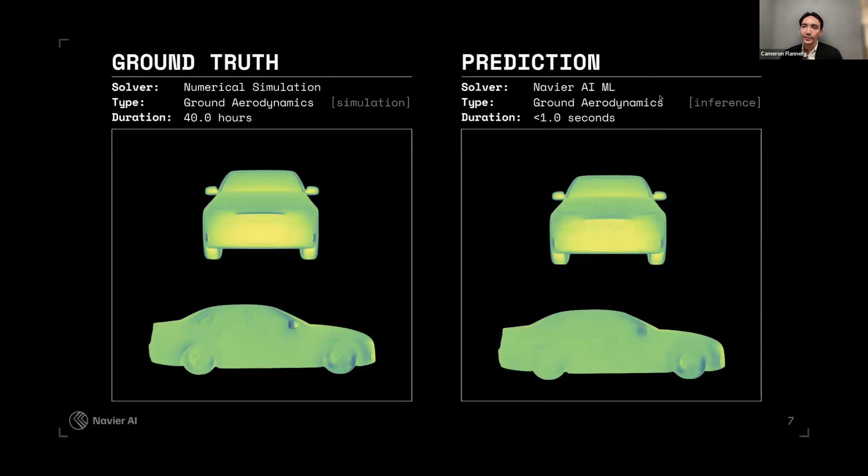As mentioned, I'm an aerospace engineer, and my co-founder is also an aerospace engineer. We have experience at some of the top aerospace and hardware companies in the world, such as SpaceX, Tesla, General Atomics, satellites at Astranis, and a few other startups here in the Bay Area. With that, open to any questions.

Awesome. All right, Richard, go right ahead. You're muted, I think, though. We're getting good at that.

No, I enjoyed the presentation. Thank you, I saw a number of examples, and one of the interests—I'm with the facilities command now with the Navy, and one of the big interests is in how structures behave in high winds. I didn't know if you have, you showed a number of examples, do you have any examples that you've done some analysis on various structures?

Yeah, that's actually one of the motivations for this problem, specifically fluid structure interaction. I was working on hydrofoils for a while for a maritime company, and fluid structure interaction is a very complex simulation, a large part of that being the complexity of the fluids. Right now we don't have a coupled fluid structure simulator. What we could do is a simulation with ML of the fluids component and then couple that with a structural solver, a traditional structural solver. That would still see a significant increase in speed. At a certain point in the future we are going to build an ML coupled fluid structure solver, but our focus right now is on these single physics solvers.

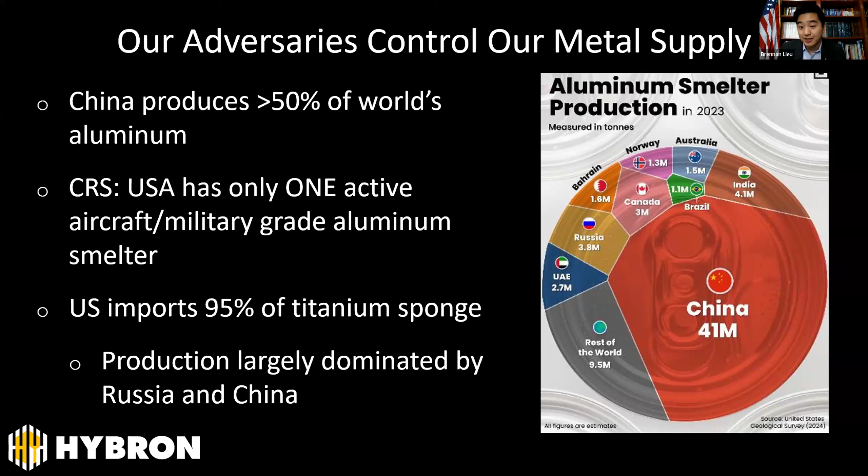The situation for titanium is also critical, where we import 95% of our titanium sponge, with upstream supply largely dominated by Russia and China. My grandparents fled the Chinese Communist Party for their lives, and my father was a United States Air Force colonel. As an American, this situation is ridiculous, unacceptable, and a serious threat.

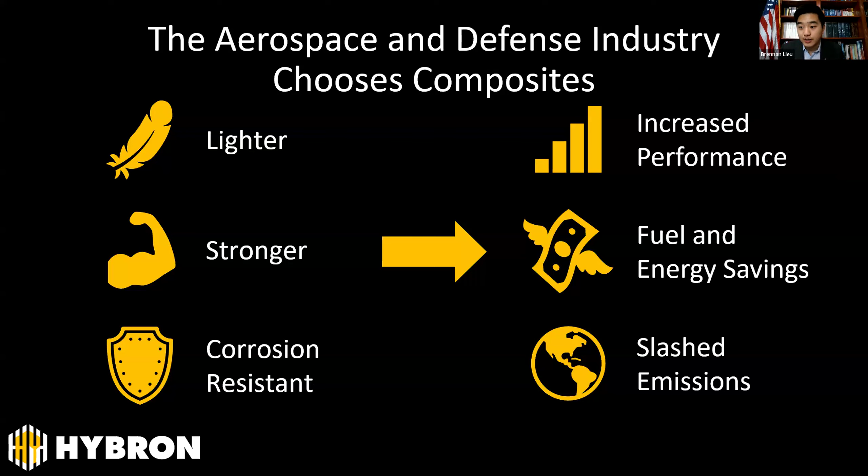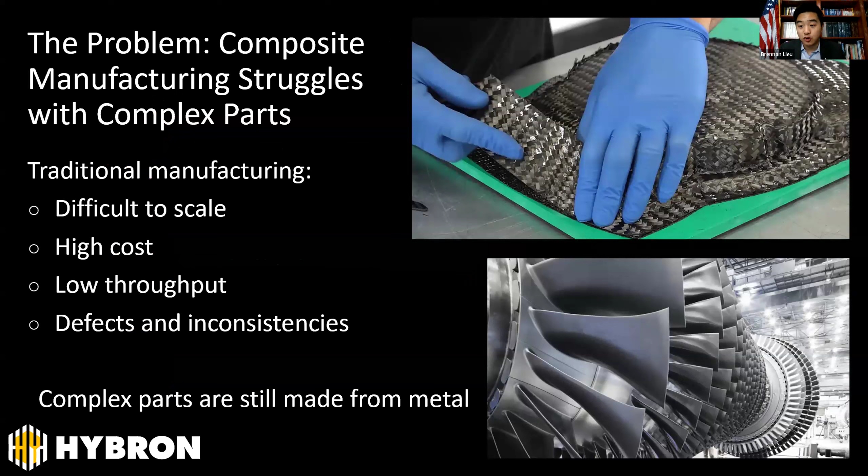Composites could solve this, and the aerospace and defense industry chooses composites for their lightweight, high strength, and corrosion resistance, which allows entire systems to achieve increased performance, fuel and energy savings, and decreased emissions. The problem is that producing composite components with complex geometries is very difficult. Traditional manufacturing involves placing each layer by hand, one by one. This process is difficult to scale with high costs, low throughput, and defects and inconsistencies. As a result, many complex structural components, such as compressor blades, are still made from metal.

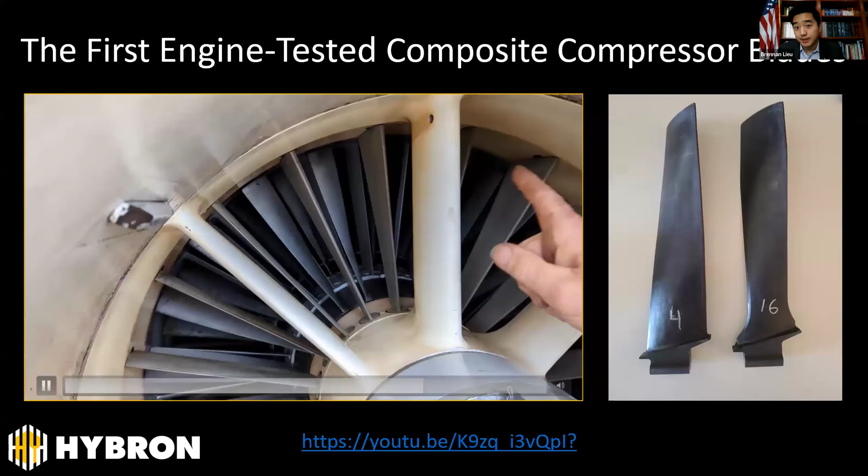We have designed a new manufacturing process to change this, and we've just accomplished something that's never been done before: running composite compressor blades in a fighter jet engine at full power and over speed, one of the highest stress environments a material can see, and we had no structural issues. Our new manufacturing process can produce complex parts, enabling new composite applications like compressor blades, and we can do it economically. We are 10 to 100 times faster than traditional manufacturing, allowing us to be more than 5 times cheaper than machined titanium at scale. We also have 20 times better thickness consistency than traditional manufacturing.

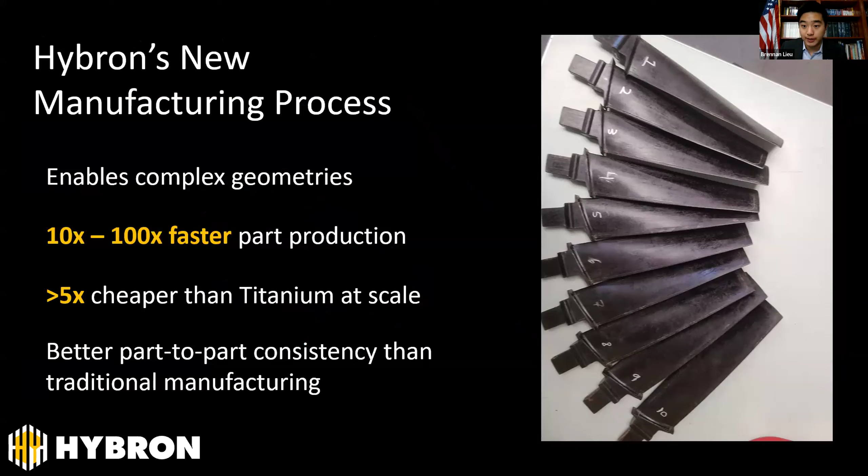Going into our team, Aaron and I have worked in the composites industry for 10 years, previously developing the first composite pushrod that increased the performance of a racing motorcycle engine by 4%. Rahul Singh, our chief growth officer, is a U.S. Marine veteran and was a Los Angeles regional engagement principal at the Defense Innovation Unit. Craig Ellis, our principal engineer, is the former director of composites manufacturing for the B-2 stealth bomber and the former chief technology officer of Northrop Grumman. We are also supported by a strong board of advisors, including 3-star Air Force General and former CIO of the U.S. Air Force Bill Bender, multi-billion-dollar exited founder Jack Barron, Stanford professor and director Fu-Kuo Chang, and distinguished UC Berkeley professor Robert O. Ritchie.

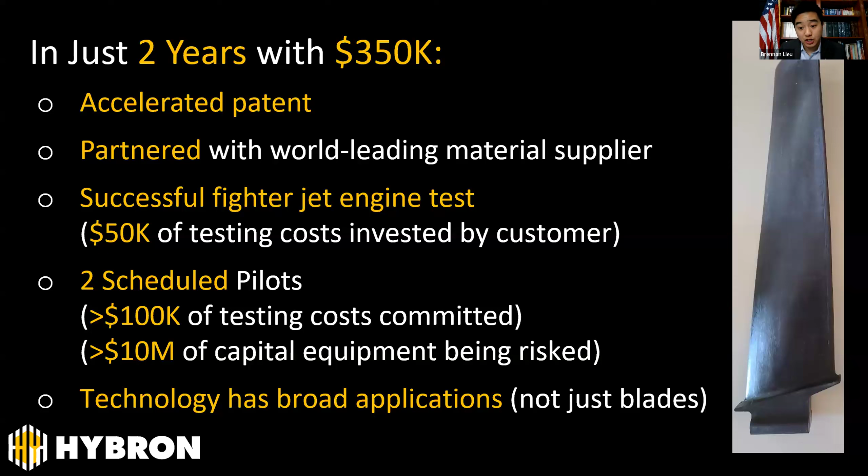Together in just 2 years, with $350K, we filed an accelerated patent application, partnered with a world-leading composite material supplier, and successfully tested our composite blades in a fighter jet engine. We have 2 more scheduled pilots where our customers will commit over $100K in testing costs and risk more than $10 million of capital equipment. Essentially, we are doing phase 1, 2, and 3 work at a phase 1 budget. Also, this technology is very broad, and we are not just a blades company. Our materials and manufacturing process can also apply to many other applications, such as munition bodies, aircraft structures, drone parts, and satellites.

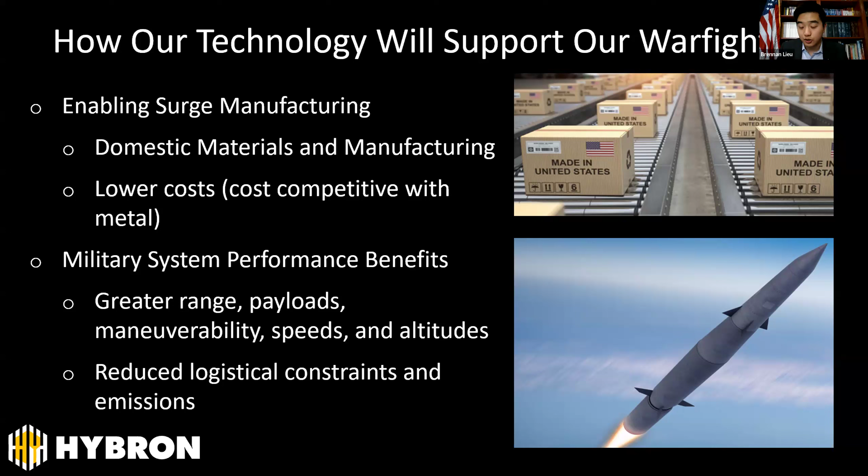For our warfighters, we will enable surge production because our raw material and manufacturing is all domestic, eliminating reliance on our adversaries, and we will make composites low cost and cost competitive with metals. In addition to these manufacturing benefits, we will also be upgrading the performance of these military systems for our warfighters, with lightweight composite parts allowing systems to have greater range, payload, speed, altitude, and maneuverability. Also, lightweighting will reduce logistical constraints and GHG emissions.

We've already received letters of support from Space Systems Command and from the Air Force's Autonomous Collaborative Platforms Manufacturing Lead, and are working with the Air Force's Materials and Manufacturing Directorate. We are also part of the U.S. Navy's NavalX Crucible Accelerator, being one of 2 companies selected under the category of Sustainable Infrastructure and Green Technologies. In addition, we are one of 6 companies accepted out of about 100 that applied to be in the Northrop Grumman Technology Accelerator. Currently, high-performance military systems like aircraft wings are composed of complex structures that are assembled from many

different parts, like spars, ribs, and skin sections, where these separate parts take hours to days to produce, and the additional assembly steps add significant labor, cost, and time. As one example use case of our technology, which we are currently working with a large aerospace prime on, with our capability to mold complex geometries, we could mold a stiffening pattern into the skin. This would essentially combine many separate components into a single part, removing these costly assembly steps. Combined with our high speed, we could reduce the time necessary to produce assembled structures by multiple orders of magnitude, being a key enabler to the Department of Defense's affordable mass initiatives.

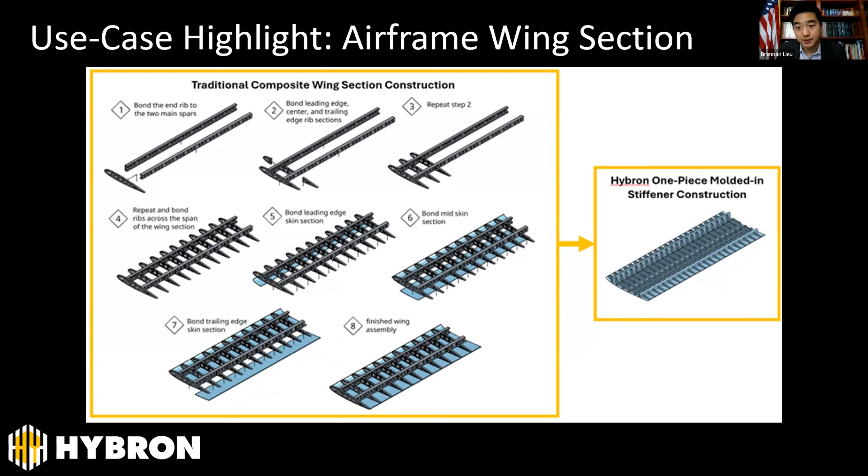Our ask is that for any DoD and industry stakeholders, we would love to set up follow-up meetings to delve into our technology, use cases, and opportunities. We're currently working with aerospace primes like Northrop Grumman with their technology accelerator. However, we're very open to connecting more potential industry partners, such as drone, munition, and missile producers, who would integrate our lower cost and higher performance parts into their products. I'll also add that a large part of our funding so far has been from internal research and development funds from large aerospace primes. We would love to have your support as we revolutionize lightweight component production.

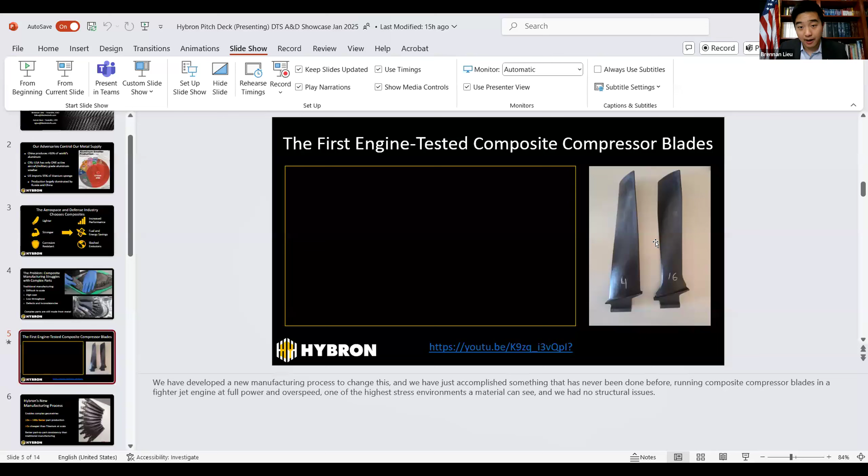What we did is we actually took the blade, and your typical rules of blade design is if you have a nick in your bottom third of the airfoil, you have to throw it away because it'll tear itself apart from centripetal loads. And if I could just show my screen again, with this blade, we actually made it weaker on purpose near the bottom third of the airfoil. This is something you couldn't do out of metal. If you did this out of metal, it would tear itself apart from centripetal loads, and it would become a projectile.

Interesting. One last question for you on this. You talked about it being 10 to 100 times faster than traditional methods. I don't know if that's just for the compressor blades, which are pretty complex things, but what about cost-wise? Because that's also an issue with composites. How does your cost compare to, let's use your wing spar example.

So the answer to that is a bit more complicated. It depends on specifically what type of part. If we're just making flat panels, our cost might be maybe 20%, 30% lower than traditional composites for thin panels. Making very thick parts where it's a lot of stack ups and where you might have some curves, our costs there, the change becomes much more significant, would be more than 50% cost reduction in production.

But then when you're making an assembled structure where you have many separate parts and we're combining them into one part, we're looking at cost reductions in basically an order of magnitude, close to a factor of 10.

Okay, in terms of 10 to 100 times faster, let me add onto that. Our slowest process is our 10 to 15 minute molding cycle time, and traditional composites takes hours to days to lay up a part. So even if we're making flat panels, we can make them much quicker than traditional composites. And when you factor in an assembled structure, it only becomes more significant, where you're looking at on the time side closer to like 100 times different versus a 10 times difference.

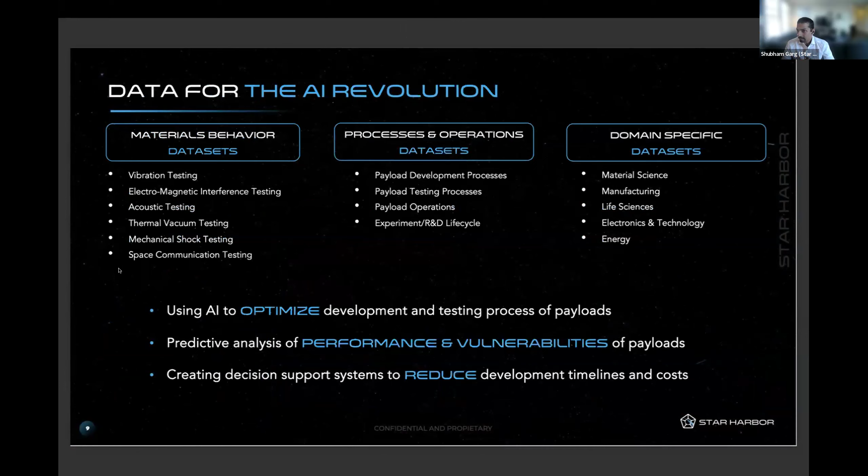These are the equipment for vibration testing, EMI, EMC. All of these equipment will be purchased with the $6 million, as well as the warehouse. All of these equipment are the assets that we will be holding. I see, okay, thank you very much.

So you're working with a lot of different people. Which would you say are your primary customers as far as actually having a platform? Is it the commercial space station companies or NASA? In other words, who will you be feeding with this?

So right now we have an agreement with Northrop Grumman for their R&D platform in space, specifically Cygnus. We also have a partnership agreement, I believe, if not an MOU, with Lunar Outpost for the LTV, Lunar Terrain Vehicle, inside of the Artemis mission. And I think there are two other companies that I can't recall at the moment - Starlab and SpaceX. Yes. Thanks, Maya. Thank you.